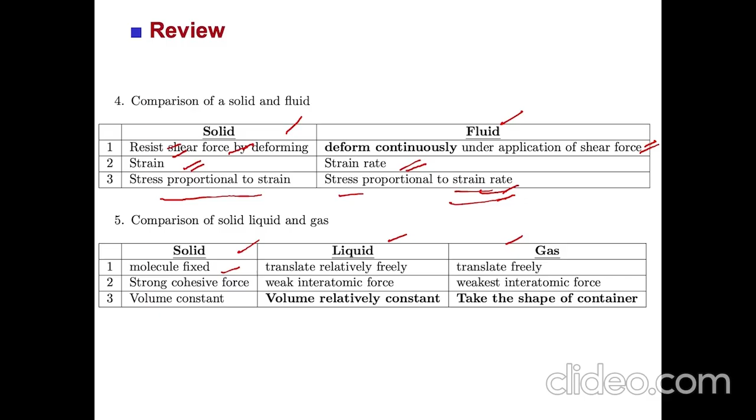Next, we compared the distinction between solids, liquids, and gases. In solids, molecules are fixed or vibrate about their lattice locations. In liquids, they translate relatively freely, and in gas, they just move around all over the place. When it comes to solids, you have a very strong cohesive force. That is why the molecules are fixed to their location. In liquids, the interatomic forces are weaker than solids but still stronger than gases, so it allows them to move around freely but still constrained in some sense. While in gases, it has the weakest interatomic forces.

This you're familiar with. The key thing I want you to take, which you might be less familiar with, is how these forces and this molecular structure determine the volume. In solids, it's very obvious the volume is constant, while in gases, if you enclose a gas in a container, it will always end up taking the shape of the container. It will expand out to the volume provided by the container. But because the interatomic forces in liquids are somewhere in between solid and gas, the volume is relatively constant.

So we talked about a container or a bottle. If you just fill half of it, you'll see a volume that is half. It's not like gas, where this liquid water will fill up this whole thing. You might have some gas here, but the liquid will be confined. So it will all depend on the volume of liquid you have. It takes somewhat the shape of the container, but it all depends on the amount of liquid it has.

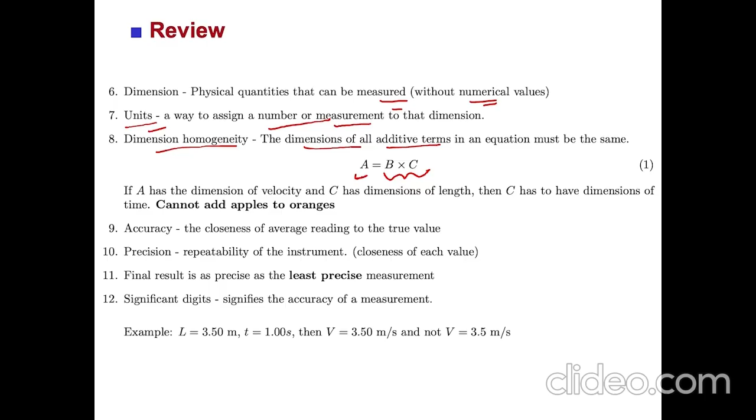The one thing I emphasized is dimensional homogeneity, that any quantity that is added up or subtracted has to have the same dimension, right? So if you're equating two quantities, here A and the product of B times C should have the same dimension. It cannot have different dimensions, right? If not, you're essentially saying you're adding apples and oranges, which is not possible.

Okay, next up we looked at accuracy and precision. Accuracy is essentially the closeness of the average reading to the true value, right? So if you have 20 points, how close is this average to the true value. If the true value is in the middle, then it's perfectly accurate. But if the true value was out of the way here, this is not very accurate, right?

While in the case of precision, it's talking about how distributed these points are, right? It does not matter how close it is to the final value. So if this is one distribution and the next distribution has everything very close to each other, this is more precise than this, right? So the other way to look at it is the repeatability of an instrument. If you make 10 measurements, it always gives you the same or very close to the same measurements. So that is the precision of an instrument. Okay.

The last thing we talked about when it comes to precision is if you're adding, taking a product of two measurements, or dividing, the final result is only as precise as the least precise measurement that you made, right? So that is something to keep in mind and be mindful of.

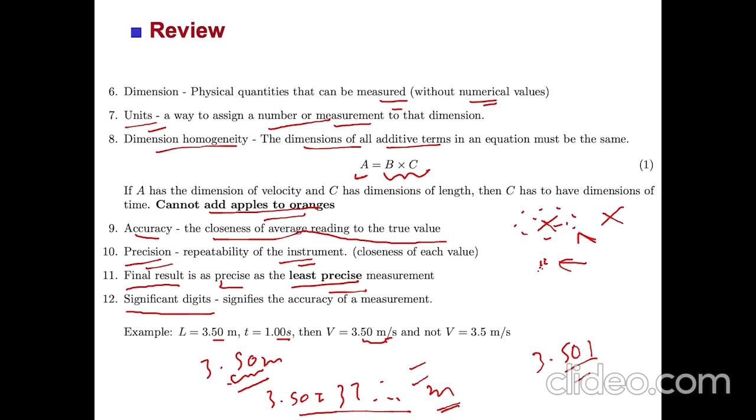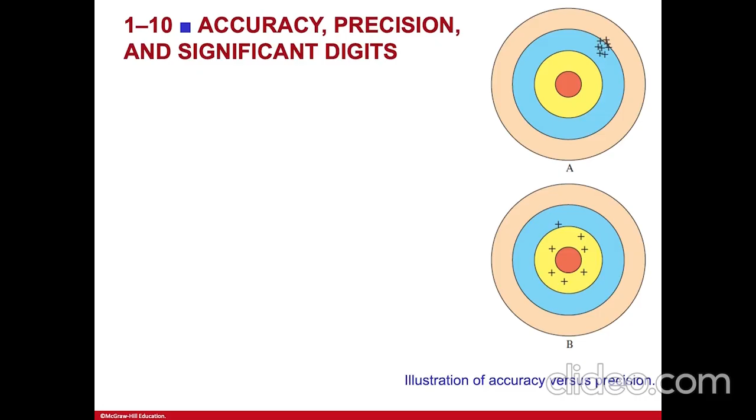So some of the last things in this first introductory section I want to emphasize is the distinction between accuracy and precision. Accuracy and precision are often mixed up and used interchangeably, while in reality they are two very different concepts. So when it comes to accuracy, or inaccuracy, in general,

accuracy of a set of measurements, if you have multiple measurements taken by the same instrument, refers to how close the average reading is to the true value, right? So if you have 10 measurements and you average them out, how close is it to the true or expected value?

Whereas when you talk about precision, in general, you're talking about a set of measurements you're taking. It refers to the fineness of the resolution or the repeatability of the instrument, right? This is best explained by these two examples.

So if you see here, you're hitting a target. All of these hits made are very close to each other, in a very confined area. You're making 10 shots and always hitting the same point, but consistently the wrong same point. So this is essentially precise, but it is not accurate.

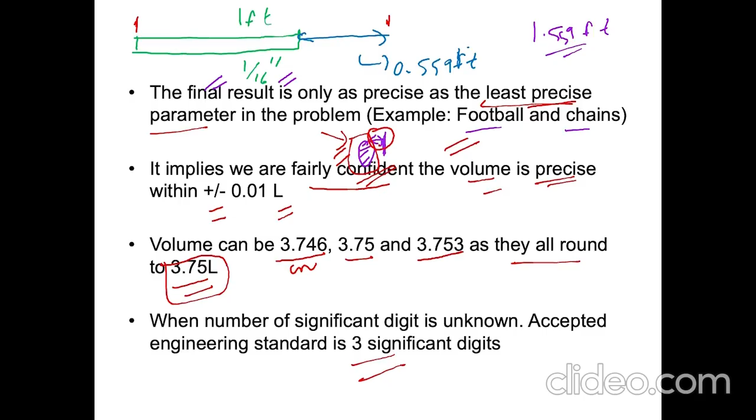Next up, now that we went over the basics of fluids and solids, and in between fluids, liquids and gases, I want to highlight certain applications that come to mind. I'll have these links on the slides that you can look at, but I want to highlight a couple of them.

When it comes to fluid mechanics, the most obvious examples are flow over a pipe, or aerodynamics, flow over a flight, plane or cars. These are some of the obvious ones that I don't want to cover. I want to highlight some examples that are less obvious to you.

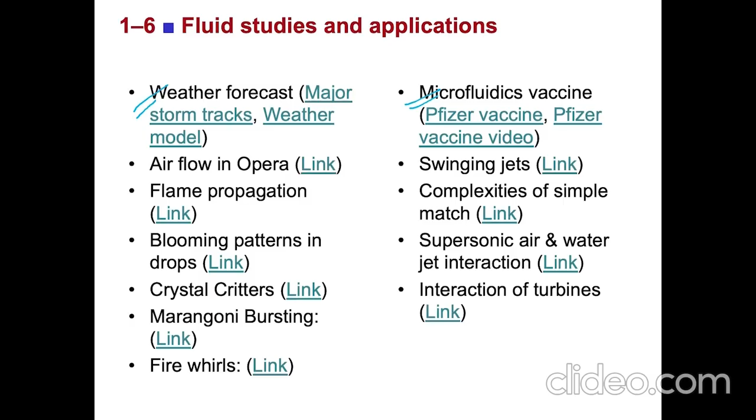So some of them I have listed, but a couple I will talk about are weather forecasting and microfluidics. Medicine delivery, drug delivery, or manufacturing of medicines or vaccines, fluid mechanics still plays a big role in it.

So when it comes to weather forecasting, I have this taken from NOAA's website. These are tropical storms or cyclones that have occurred around the North American continent from 1949, so more than 50-60 years of span.

What I want you to start thinking, if you look at these patterns and paths, every wiggly line is essentially the path of a storm at some point. As a scientist or engineer, try to see if you can find certain patterns or behavior that these storms have when it comes to USA. Let's start with just USA.

So specifically, couple of things that come to mind: if you look at how they're originating, they're all originating from near the equator. You can see there's a bunch of lines always near the equator. That's one thing you can get out of this simply by observing it.

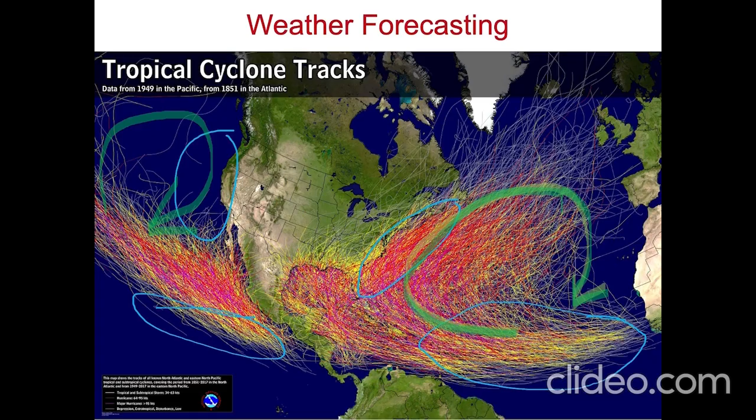So with that being said, another example, kind of slightly different from the traditional example, is related to vaccine development. So now with COVID, having just passed and recovered from a pandemic, we all heard about the vaccine and how it's developed.

So the novelty or the ingenuity was about developing this mRNA vaccine. mRNA itself has been something known for a while. It is not that it was developed, or that technology came up during COVID. mRNA itself has been around for a while.

The issue was mRNA by itself is very unstable. So if you create a vaccine, it will not last for too long. It does not have as long of a shelf life. So how do you make a vaccine that will have a long shelf life, that can be transported to different parts of the country or even the globe, and still stay stable for days and months, so that it can be administered to patients in need?

So the main discovery or ingenuity came in figuring out that if you coat mRNA with these lipids, these tiny particles, the lipids themselves are stable, and that keeps the mRNA stable or protected in some sense. But the point is, how do you do this in a very successful, high production rate manner?

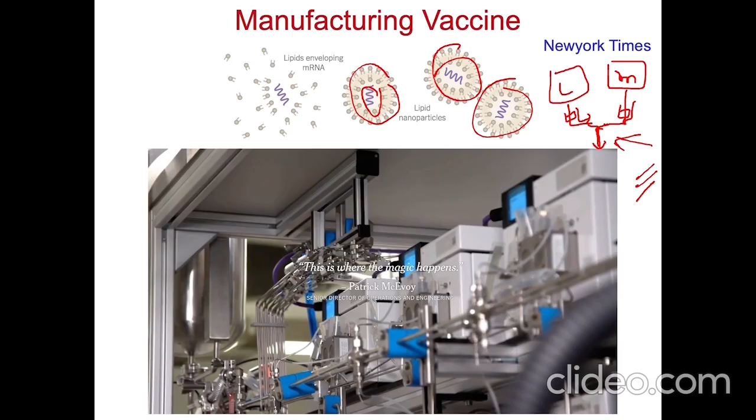Okay, next we'll be covering two important concepts in engineering, which are dimensions and units. I want to specify that this is nothing specific to fluid mechanics. It's a general engineering concept which you can use in different aspects, and probably some of the things we are talking about you've already heard of. So the first thing is called dimensions. Any physical quantity can be characterized by dimensions. One of the dimensions you can think of is length. Another example of a dimension is time. Another can be mass, and so on and so forth.

Now, when you assign magnitudes with respect to specific dimensions, then it starts making more sense. The magnitudes assigned to dimensions are called units, essentially. The main thing I want to emphasize here is that whenever you are solving any problem, you have to be very, very careful with the units. You have to make sure you're using consistent units throughout. This might seem trivial, but it has real life consequences.

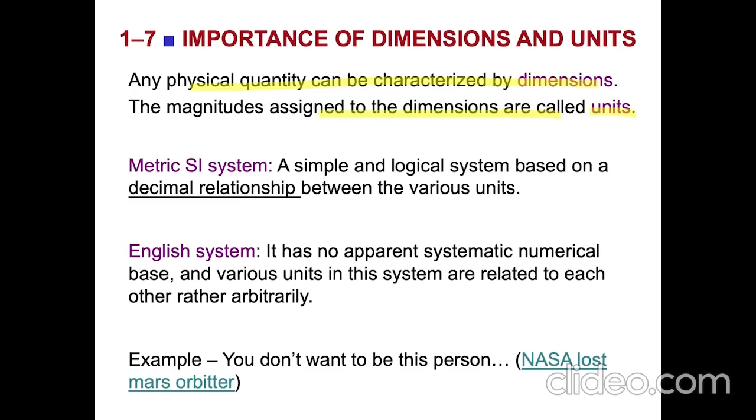The two common unit systems are the metric system and the English system. It doesn't matter which one you follow, you just have to be consistent throughout the problem you're solving. I'm pretty sure you might have heard this, but you don't want to be this person. I think it was back in 1999 when NASA lost a Mars orbiter.

And the whole reason for this loss was that NASA uses SI units, but they had outsourced some of the work to Lockheed Martin, and one of the persons, or I guess a team of persons, at Lockheed Martin used the English system versus the SI system. And they never made the proper conversion or made the units consistent. Naturally, that led to miscalculations, like instead of saying 100 meters, saying 100 feet. There's a big issue with that.

And that completely led to a project loss of $125 million, and that's just the cost of the orbiter. If you think about the cost associated with other things, just the launch and the workforce, that is way higher than this $125 million. So this looks like a trivial issue that every professor raises, but it has real life consequences.

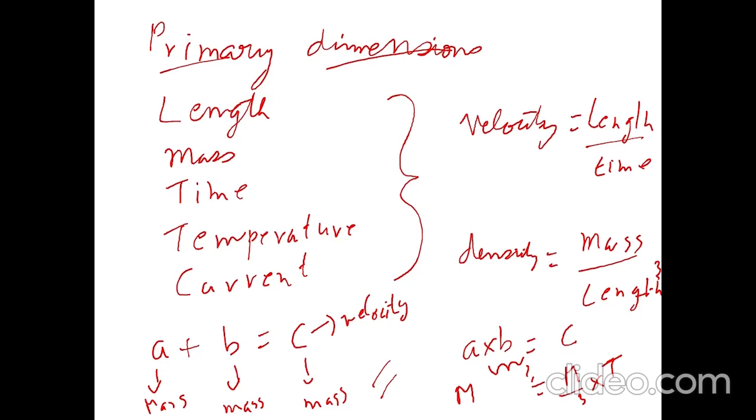So let me give an example here. Let's say you have a relation where A times B is equal to C, and the dimension of C is mass per length cubed times time. And you somehow know that A has a unit of mass, but you don't really remember what the dimensions of B are. But by using this fact that the dimension of every quantity or summed quantity has to be the same, you know that A times B should have the same dimension as C.

So since A times B has to have the same dimension as C, which is M divided by L cubed over T, that means the dimension of B is one over L cubed times T. Now you can see that these two dimensions are consistent. So essentially you're not ending up adding apples plus oranges. That's kind of the goal here.

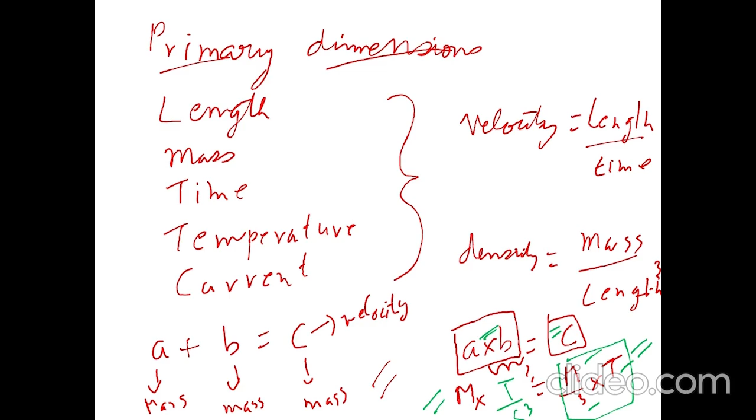So this comes in really handy, and I'll be using it throughout the course, this consistency in dimensions, and there's a chapter we'll come across later in the course. But this is an easy way to check consistency of the problems that you're solving, and also consistency of the derivations. You cannot have a situation where your dimensions on the left hand side and the right hand side are different, or the units are different. And that's all related to the consistency check. So that's the key takeaway I want you guys to get from this slide about dimensions and units. You need to have consistent units, and you need to have consistency in dimensions.

And so on D2L you will find a format of solving this problem. So a couple of things here. In the beginning, I'll just highlight some of the key things. Before you solve the problem, I need to see some of these quantities, and it is all based off this principle of modeling in engineering.

So one is I need to see a schematic. Essentially you can think of a schematic as some kind of free body diagram. A schematic is a rough diagram. It doesn't have to be perfect lines. It can be a rough sketch, but it needs to quantify what is being asked to solve and describe what is given to you. So it's a good habit to develop to draw schematics for problems. If it's a word problem that is given, can you draw a corresponding schematic?

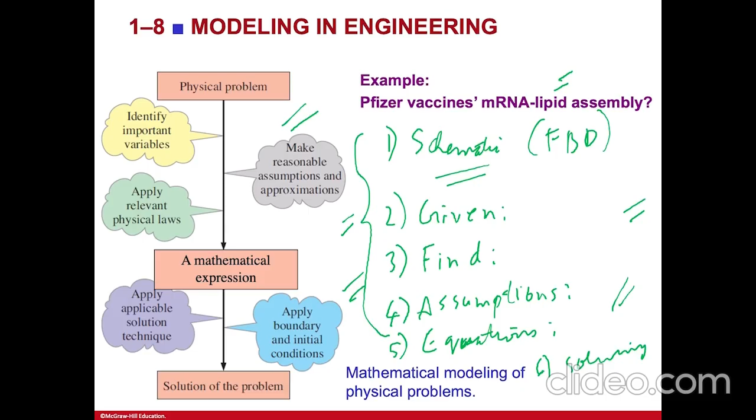Some of the forces and stresses that are experienced in a fluid element, right? You'll see that some of these forces you are familiar with. Any forces a fluid experiences, from the most complex forces for the most complex fluid flow to the simplest forces, might be called by different names, but they all originate from just 2 fundamental forces, right?

Or stresses, right? So first I want to refresh your memory on the difference between a stress and a force. You will be coming across this multiple times in this fluids course. Stress is nothing but force per unit area, right? So what is the difference between a surface force and a body force? I'm not sure if you have heard of these terminologies before. Probably you have, but I wanted to refresh your memory if you've forgotten.

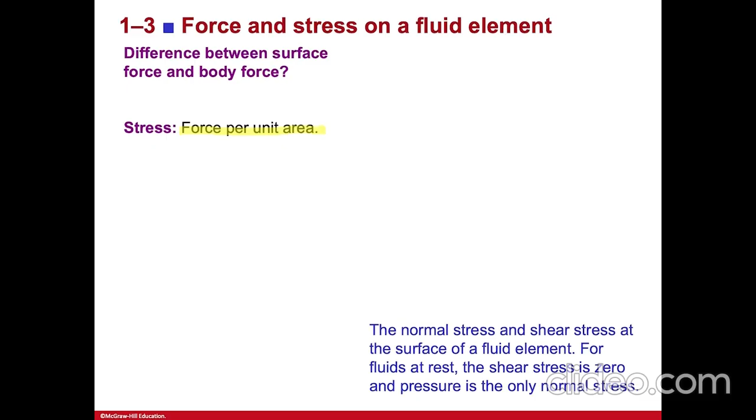So now that we have talked about stress, if we go into forces, you can subdivide these forces into surface force and body force, right? Surface forces are essentially forces like pressure. Let me just change my pen quickly. So examples of surface forces would be pressure, or stress. On the other hand, examples of body forces would be gravitational force, or gravity, or electromagnetic force.

So you can probably guess from the name itself. Essentially, surface forces are forces that act on the surface of a system. If you're applying pressure to a body, you're applying pressure just on the surface, right? So if you have an object or a system that you're studying, pressure means forces acting just on the surface. So that is pressure for you. Similar with shear stress or other stresses.

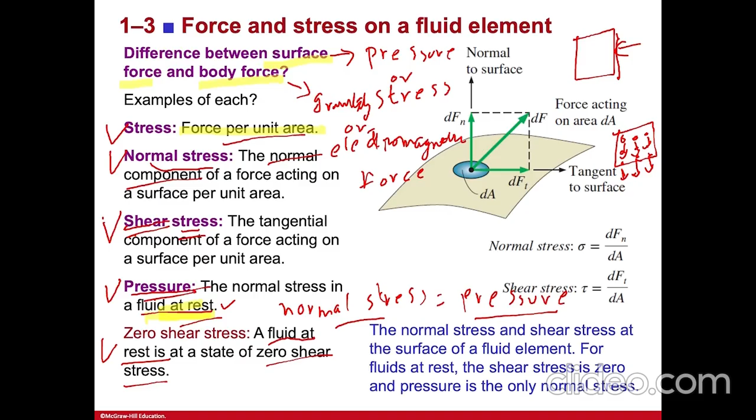And last but not least, stress is force per unit area, something we'll need multiple times throughout the course. Now that we have gone over basic terminology of forces acting on an object or a system, specifically fluids, let's refresh your memory on the basic differences between a solid and a fluid.

First, something students often confuse: when you're talking about a fluid, both liquid and gas are types of fluid. A fluid means both liquid and gas. It's not just liquid and it's not just gas; both fall under fluids. So what is the basic difference between a solid and a fluid?

For a finite amount of force that you apply, this shear deformation would be finite. So that is the main thing about a solid: it can resist any applied shear force by deforming.

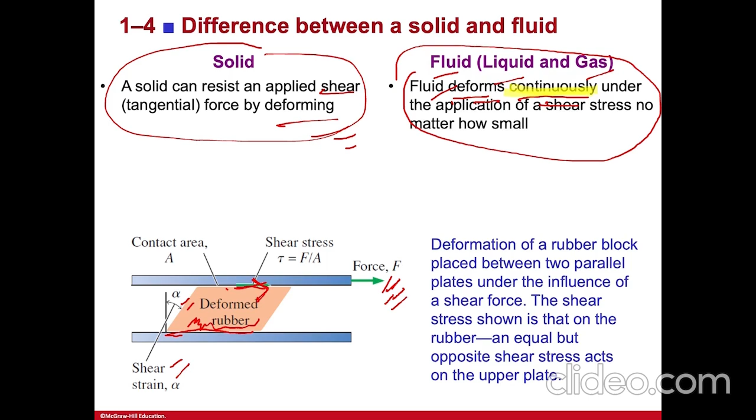As a result of finite deformation in solids and continuous deformation in fluids, there are two main differences that happen. If you think strain is essentially the extent of deformation, if you remember from solid mechanics, linear strain is delta L, the change in length over the original length of the object. If you're talking about shear strain, you're talking about change in angle of the system you're looking at.

In solid mechanics, hopefully you remember that stress is proportional to strain. But now the challenge comes in fluids, you don't have a finite deformation anymore. Let's say if you look at the fluid, how much it has deformed in 1 second, you'll get a certain angle. But 2 seconds later, since it's continuously deforming, this angle would have changed from, let's say, 5 degrees to 20 degrees. 5 more seconds later, it would have changed from 20 degrees to 30 degrees. So because a fluid is constantly deforming, you cannot define a strain for a fluid, meaning both liquids and gases.

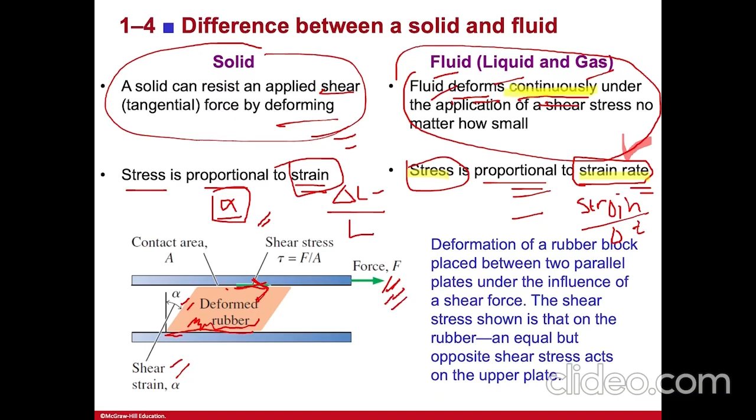So when you're dealing with fluids, you talk about stress being proportional to strain rate. This is one of the key takeaways for you: when dealing with fluids, you're talking about stress being proportional to strain rate and not strain, because fluid is continuously deforming. So these are the two things you need to take away from this slide. This is what defines if an object you're studying is a fluid or a solid. If it is continuously deforming under shear, then it's a fluid. If it's not continuously deforming, then it's a solid.

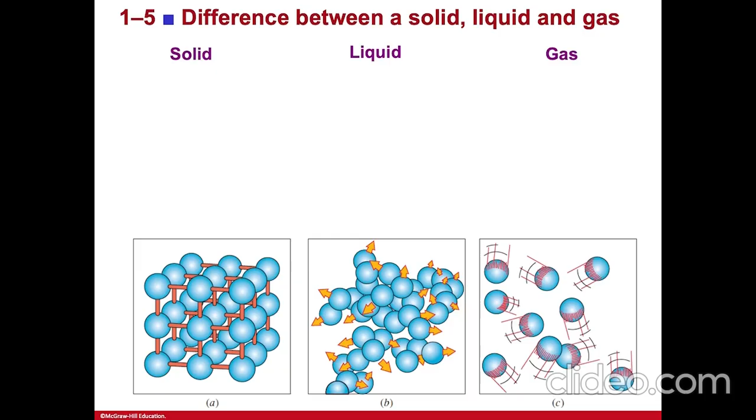So now that we have that, the next distinction I want you to make is between solid, liquid, and gas. So in a fluid, what's the distinction between liquid and gas? Some of these things you are already aware of, and it's pretty obvious.

So when it comes to solids, if you think about the molecular patterns or arrangements, the molecules are arranged in a specific pattern, and it's often repeated throughout. So probably you've heard of FCC lattice structure, BCC lattice structure. When it comes to liquids, molecules are no longer specifically arranged in a specific pattern. They are allowed to rotate and move around and translate freely. And when it comes to gases, there is literally no order at all. It can bounce around and move anywhere.

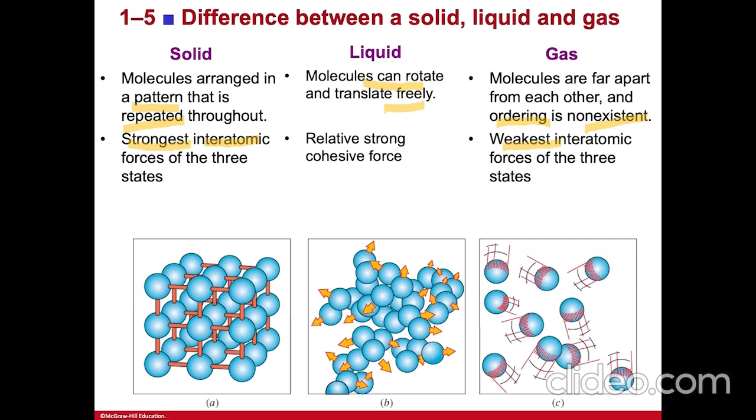And this is as a result of the interatomic forces. When it comes to solids, you have the strongest interatomic forces. When it comes to liquids, it is relatively less - the strength is less than solids, but still stronger than gases. And of the three, the weakest interatomic forces are that of gas.

So the last two points you are probably well aware of. The next point is something I want to highlight that is probably less familiar. When you talk about the volume of a solid, it often stays constant - that is very intuitive. But when you talk about liquid and gas, things are slightly different. When you're talking about volume of a liquid, it stays relatively constant, and I want to emphasize and clarify this when you compare it with volume of gas, which actually varies depending on the size of a container.

So for instance, if you have a hydrogen or helium balloon, a gas balloon that you bought off a store for a birthday - if you release the gases, what is the volume it will occupy? If you give enough time, it will fill up the whole room that you have. If the whole room has leaks, it will actually fill up whatever space it's contained in. But initially, till you did not release it, it actually filled up the whole balloon.

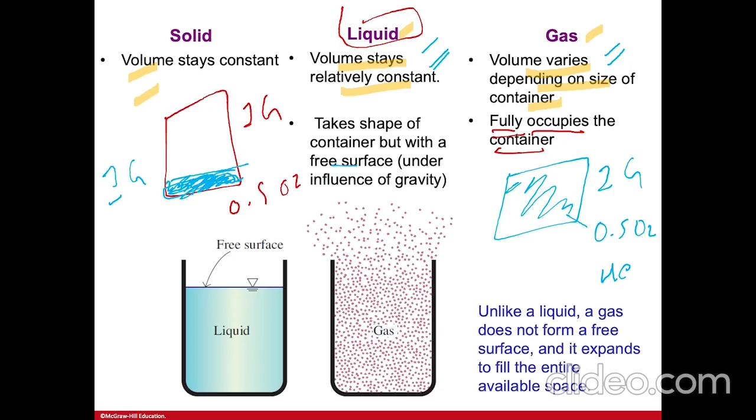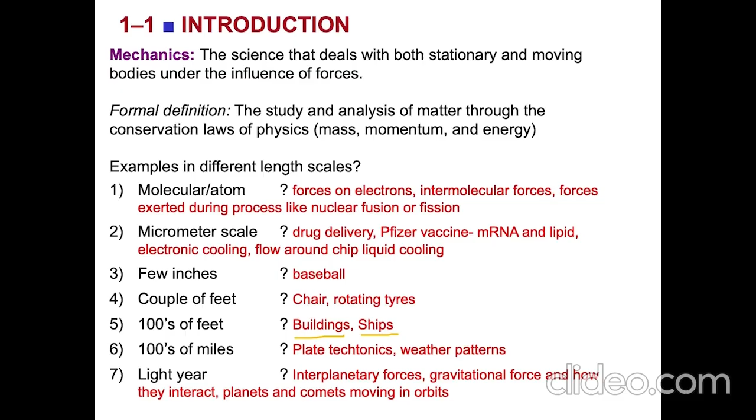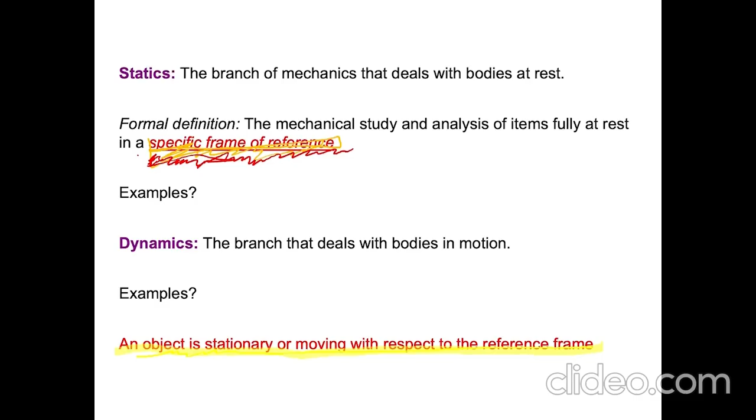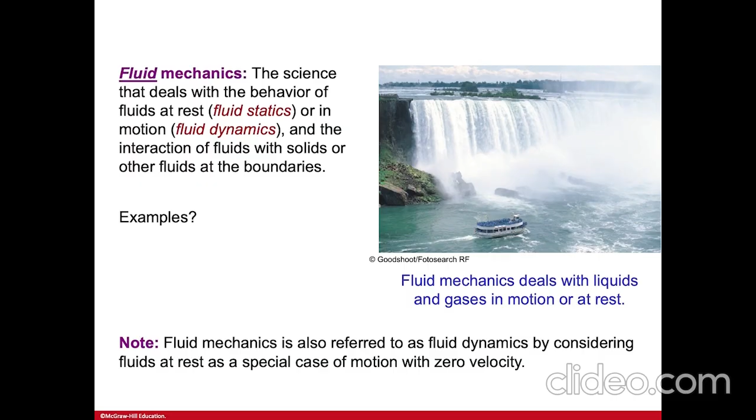So now that you have a basic understanding of statics and dynamics, which you're probably familiar with already from your previous classes on solid mechanics, next comes fluid mechanics. As you have guessed, it is nothing but the mechanics or the science of dealing with the behaviors of fluids. Is the fluid moving? Is the fluid stationary? Anything that has to deal with fluids falls under fluid mechanics. So fluid mechanics is a very broad term.

Okay, so subcategories or sub-terminologies often used for specific problems under fluid mechanics include hydrodynamics. When you hear the word hydro, what comes to your mind? Hydro generally refers to water. So any study of motion of fluids that is specifically related to water falls under hydrodynamics.

But water you can think of as essentially a liquid. So more often it is used more broadly to refer not just to liquid water, but to the study of any liquids. That's what it means when you're talking about incompressible. Liquids are generally assumed to be incompressible, which means you cannot compress or change their density. So hydrodynamics is not just the study of water, which is the literal meaning, but more broadly the study of liquids in general.

When it comes to gas dynamics, as the name would suggest, it refers to the study of gases. So it can be the study of air moving around, or if you're, let's say, designing a gas turbine engine, the study of fumes or different gases going through the combustion chamber of that engine. Those all come under gas dynamics in general.

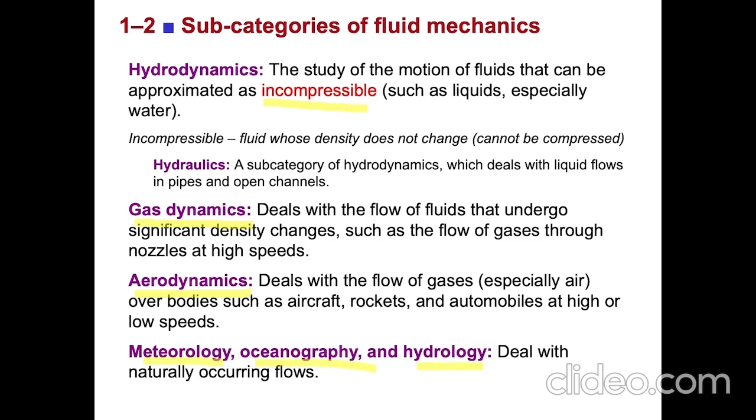Similarly, there are various other subcategories in the field of fluid mechanics. You have meteorology, oceanography, and hydrology, which deal with different specific topics of fluids.